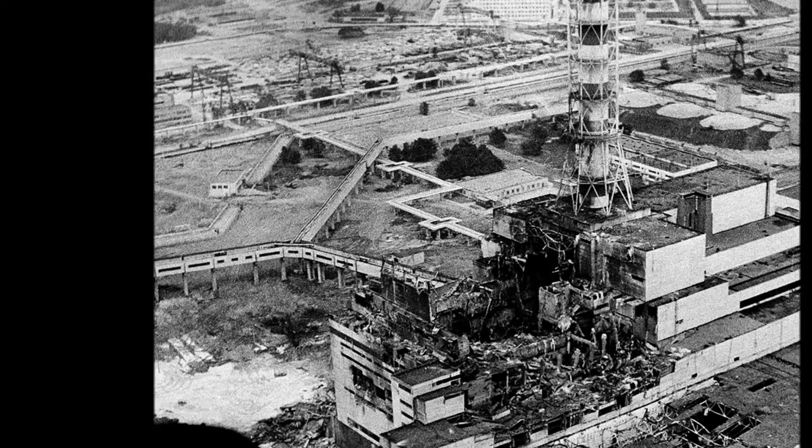The Fukushima Daiichi nuclear disaster, on March 11, 2011, has reminded everyone of the most catastrophic nuclear disaster in human history, the Chernobyl disaster. It also raised people's concern about the safety of nuclear power.

However, although there has been some potential hazard of nuclear power since it was invented, nuclear power, without any doubt, is still supposed to be considered as one of the best energy sources. In addition, if present problems with it could be effectively solved, nuclear power would definitely benefit the future of the human race to a huge degree.

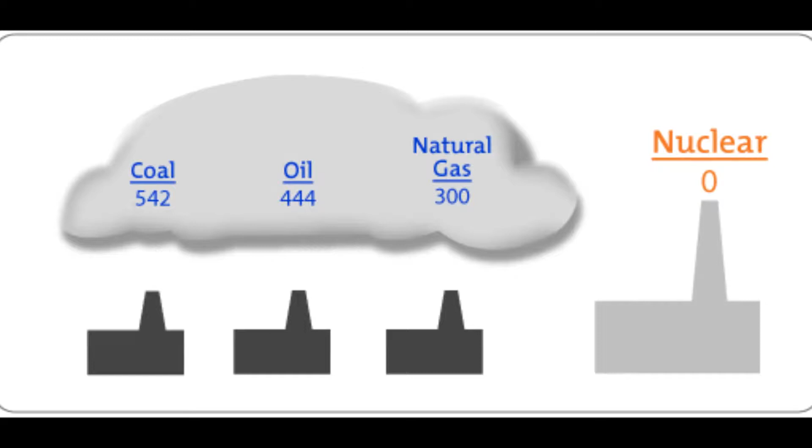Obviously, nuclear power has a series of advantages. For example, nuclear power has the lowest impact on the environment since it does not release any exhausts like carbon dioxide and methane, which are largely responsible for the greenhouse effect. Moreover, nuclear power is much more powerful, efficient, and economical than other alternative energy sources.

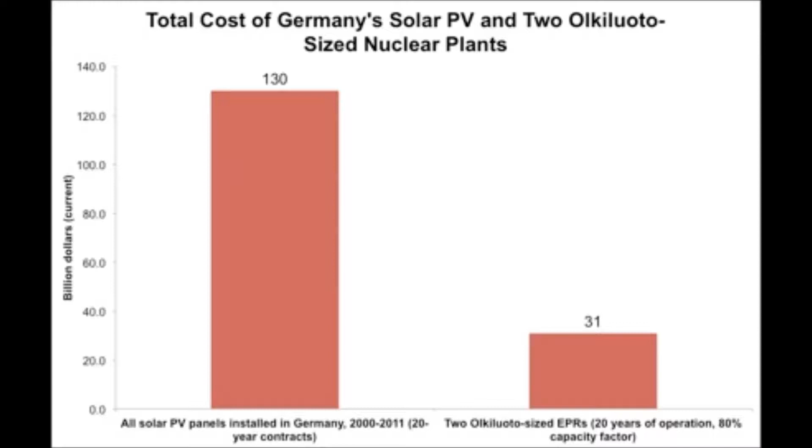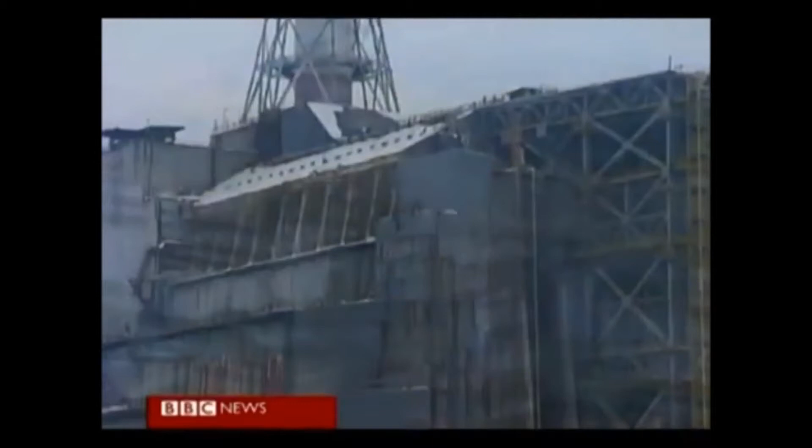Even though nuclear power is extremely promising, it still has some problems. On the one hand, when emergencies happen to nuclear reactors, they will be relatively hazardous. This is because when the containment structure of the reactors is broken due to accidents, the core of the reactors will emit a lot of radioactive rays, which can cause fatal damage to someone nearby.

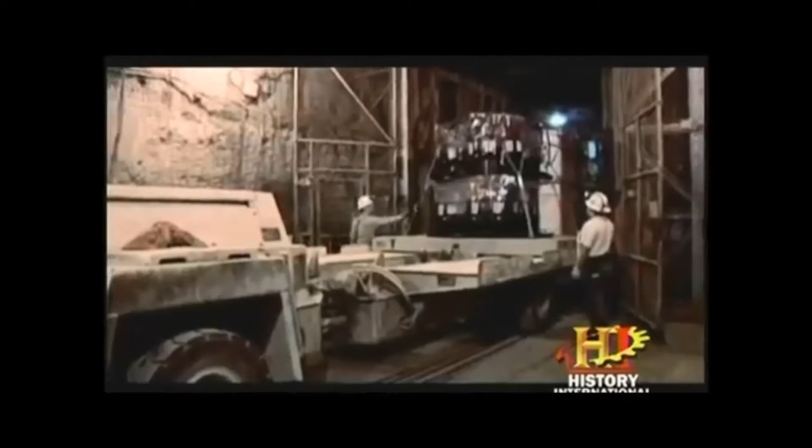On the other hand, the waste of the nuclear reaction from normal fission reactors can be hazardous as well, if it is not properly disposed of after the reaction. This is because the chemicals contained in the waste are also relatively radioactive, so they are harmful to humans.

Fortunately, there have been some probable solutions to deal with these two sorts of problems of nuclear power. To deal with the safety issues of nuclear reactors, installing the nuclear reactor safety system is an ideal option. NRSS is a very broad concept. It consists of a number of subsystems, which are all responsible for keeping nuclear reactors safe.

Emergency core cooling systems could safely shut down a nuclear reactor during accident conditions. Moreover, this subsystem allows the nuclear power plant to respond to a variety of accident conditions, so the plant can be shut down even with one or more subsystem failures.

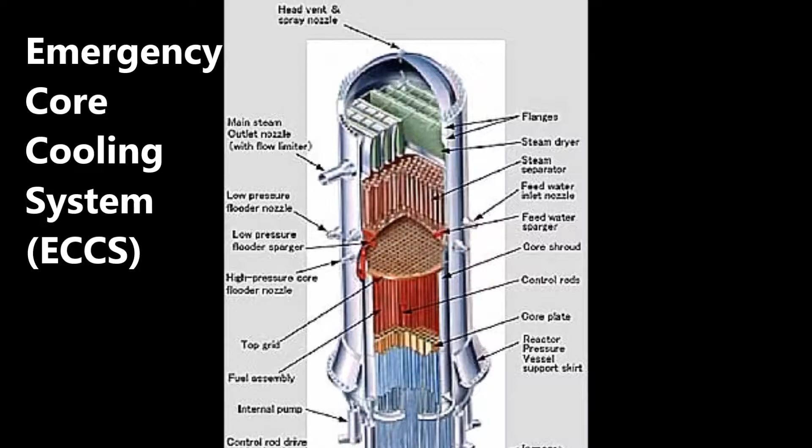As we know, under normal conditions, nuclear power plants receive power from off-site. Whereas, during accidents, plants may lose access to this power supply. In this case, emergency electrical systems could let the nuclear plants use built-in diesel generators and batteries to generate their own power to supply other emergency systems.

In order to deal with the disposal of nuclear waste, it is a good option to improve the long-term management of nuclear waste. The reason why this solution is ideal is that the hazard of usual nuclear waste can last for an extremely long time, varying from 10,000 years to 1 million years.

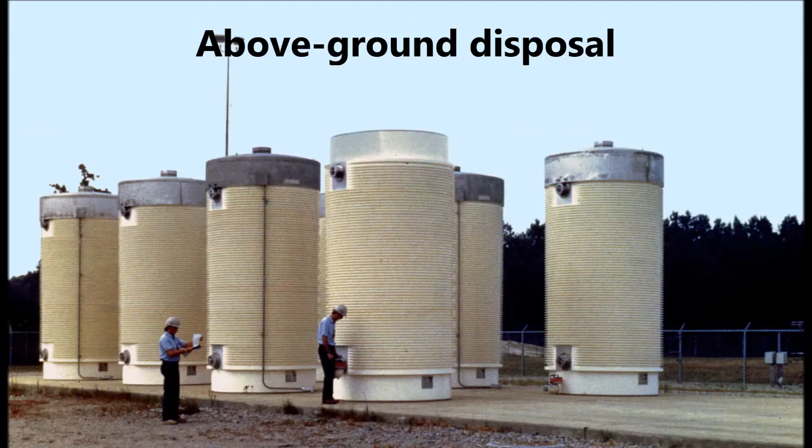One typical method of the long-term management of nuclear waste is above-ground disposal, such as dry cask storage. It involves taking waste from a spent fuel pool and sealing it in a steel cylinder, which is placed in a concrete cylinder acting as a radiation shield.

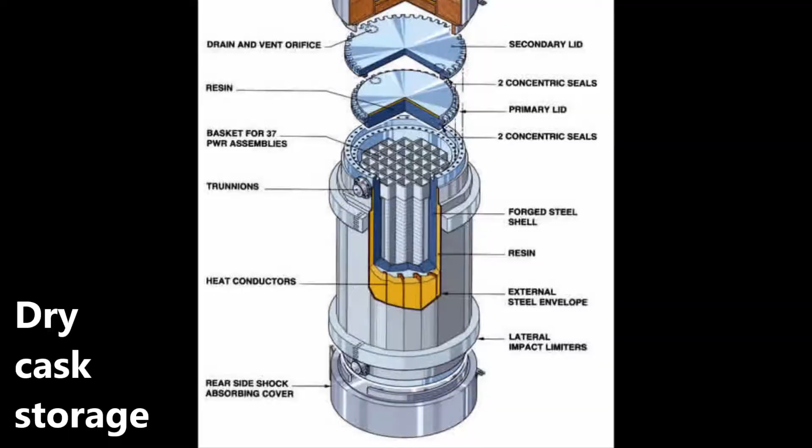Another attractive method is space disposal. It involves sending the nuclear waste into outer space using astronautic vehicles, thus permanently removing nuclear waste from this planet.

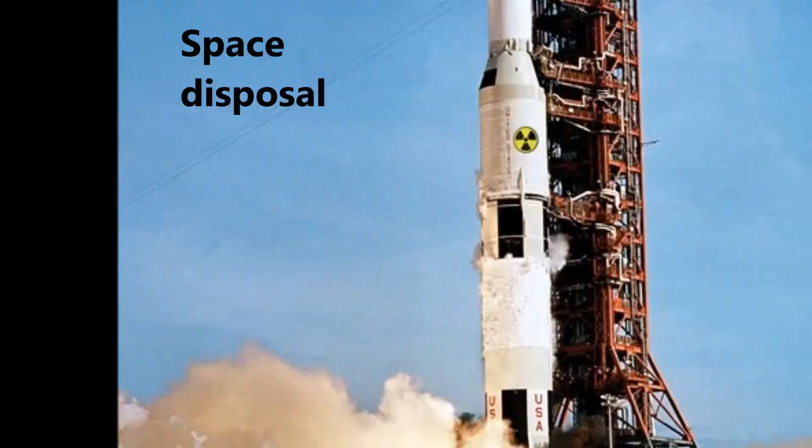In the future, the most feasible and effective method will be finding applications for nuclear waste. This is because, in this method, we can not only reduce the amount of nuclear waste but also take advantage of nuclear waste in a new way, which means the whole industrial chain will become more sustainable.

In conclusion, we believe if the two possible solutions, the nuclear reactor safety system and long-term management of nuclear waste, can be perfected and properly implemented, the present problems with nuclear power will be effectively solved. And nuclear power would definitely benefit the future of the human race to a huge degree.